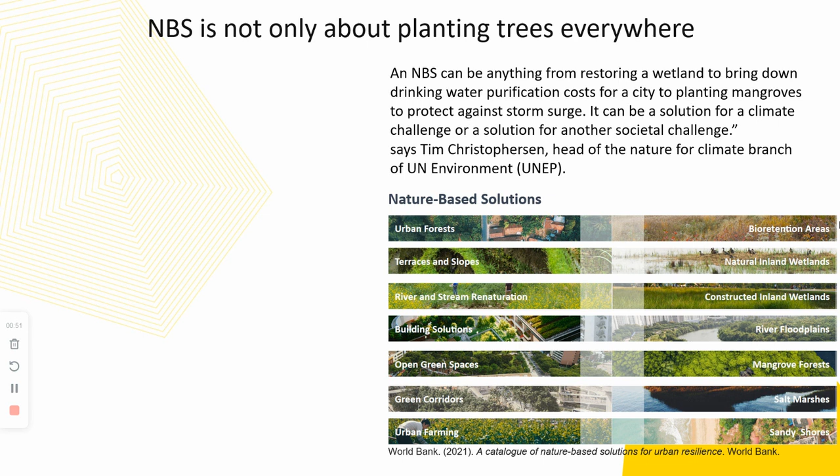The motivation is nature-based solutions. It's in our schedule, it's in our prime time everywhere, but it's not only planting trees everywhere, as you know, and some of you have been talking about. So my question is, how can we project better cities with nature-based solutions using other methods, and where to implement, in this particular case, trees, because they have provided several services, but one of them is to reduce temperatures in cities. Lisbon, three places, very different places.

I work with a municipality, and when they ask me, where do you put the trees here, I say, you don't need to put trees here. You have shadow. It's much better than the trees. Some streets are very efficient on this, but have worse ventilation. But places like that, the Praça do Comércio, it's the entrance of Lisbon, where the sailors went to New Worlds in the 16th century. They don't want to plant trees because it's against the logic of urbanism in such an imperial place. So how can we help?

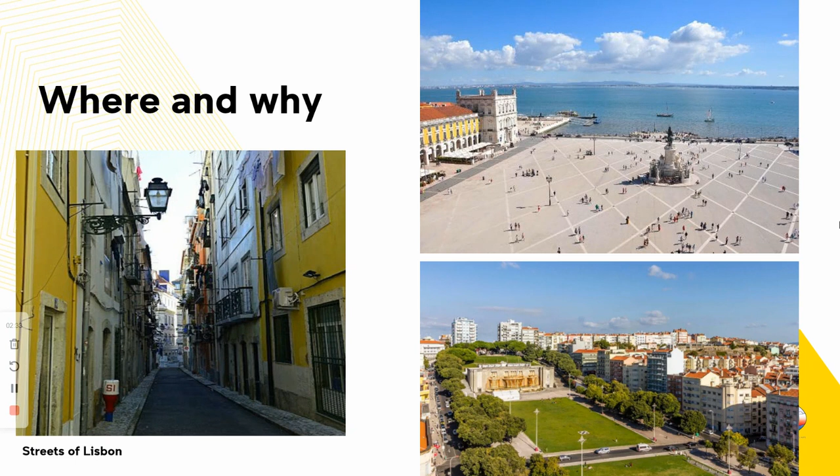And we have other places like that garden in Lisbon. As you have mentioned, lawns are much less efficient if they are not irrigated. And we have a problem in Mediterranean areas, that is, we don't have water. We have a scarcity of water. How to use water for these spaces? And for instance, in this space and others like it, sometimes the temperature is much higher during the day if it's not irrigated than in shadow spaces. So we need to carefully look at these nature-based solutions.

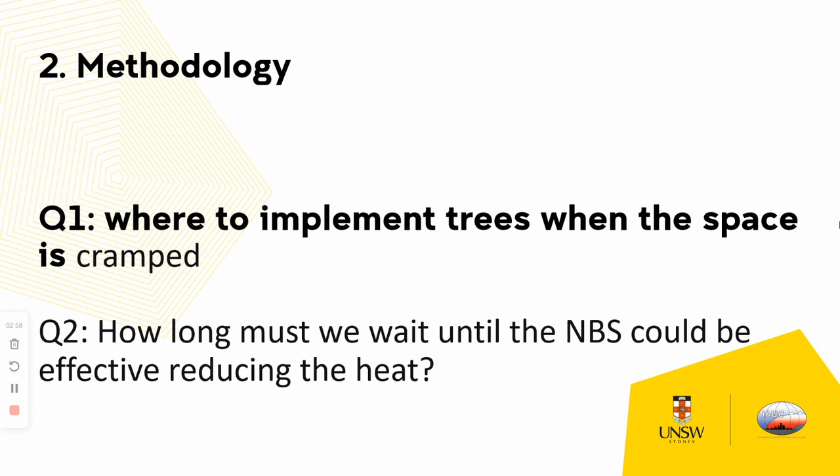So where to implement these trees when space is cramped, and how long must we wait until these solutions are effective at reducing the heat? For instance, if we plant a tree now, it's going to be efficient maybe 10 years from now, and many of us cannot be here, so we must tackle this problem now.

So the experience of Márcia, she has been okay. Yeah, sorry. Can you help me, please? Help. Thank you. No. The bottom one is the back. This one? Okay. I was clicking the wrong side.

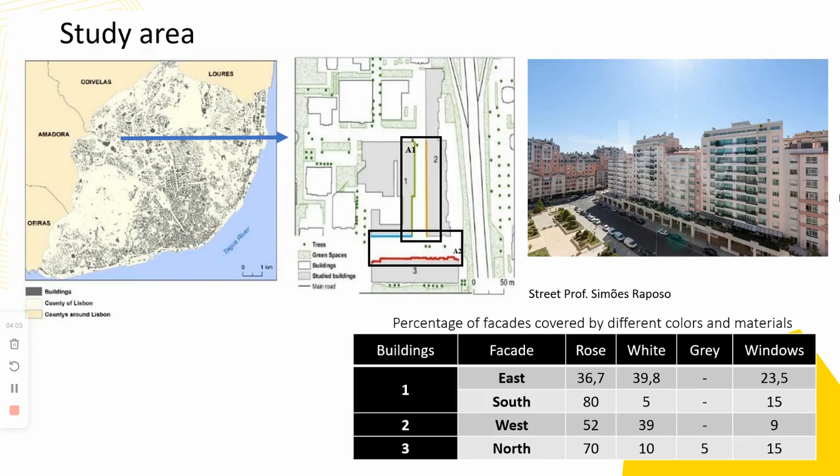So Márcia took one neighborhood in the northern part of Lisbon, two very different streets, one north-south oriented and the other one east-west oriented. So the facades are very different, and they have very different gains and losses of solar radiation. We also chose this place because we have quite a similar painting for all these buildings, especially rose, white, and gray. So now this is the so. Let's move on.

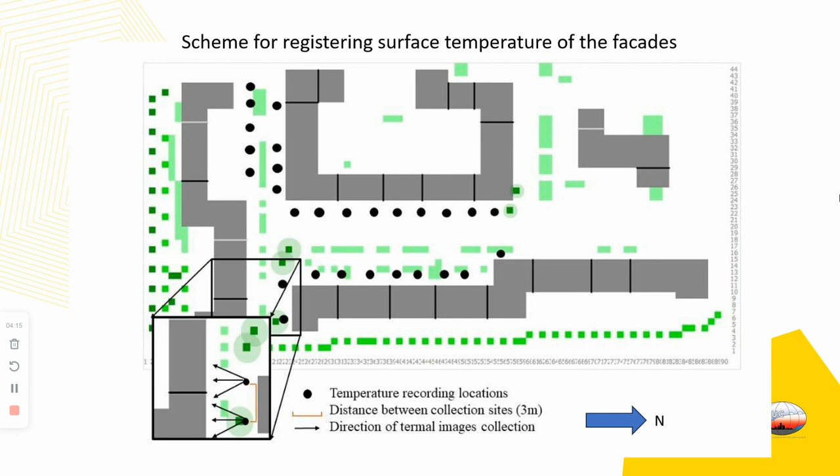We had several urban stations here, 3 or 4 stations, and she made thermal camera images to compute the surface temperatures in the facades. And as we know, the north facades generally have lower temperatures than the south facades. This is informal, empirical. We know this, but we don't know how much. So the first question I would like to pose here is, should we plant trees near the north-exposed facades, since they are less heated than the south facades? Of course, maybe we can help urbanists relocate the trees or plant the trees where temperatures are higher in the urban areas.

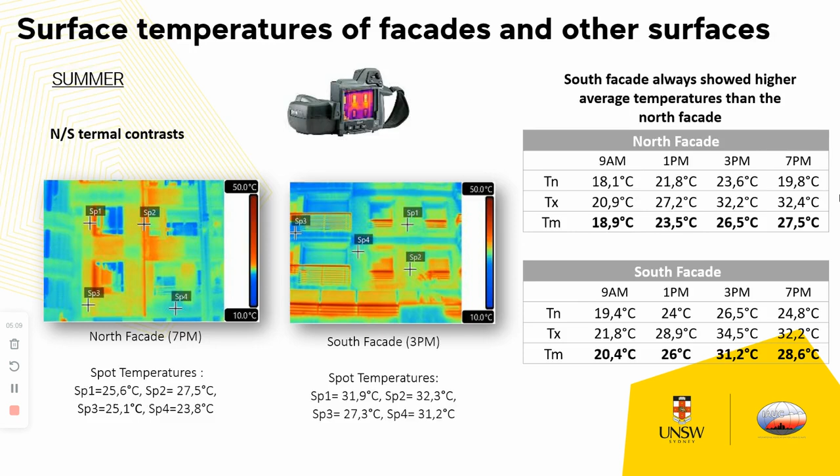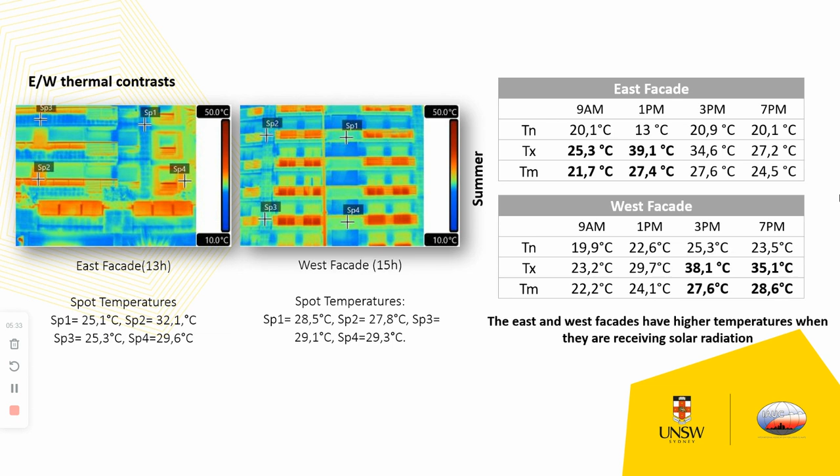So this is the east-west facade. We know there are several characteristics, for instance, between 9 a.m. and 1 p.m. temperatures are higher in the east facade because we are in the northern hemisphere, and the west facade receives more radiation in the late afternoon. So this is another piece of information that is good for making decisions. So we had three kinds of surfaces. That was facades, and now the soil, the street.

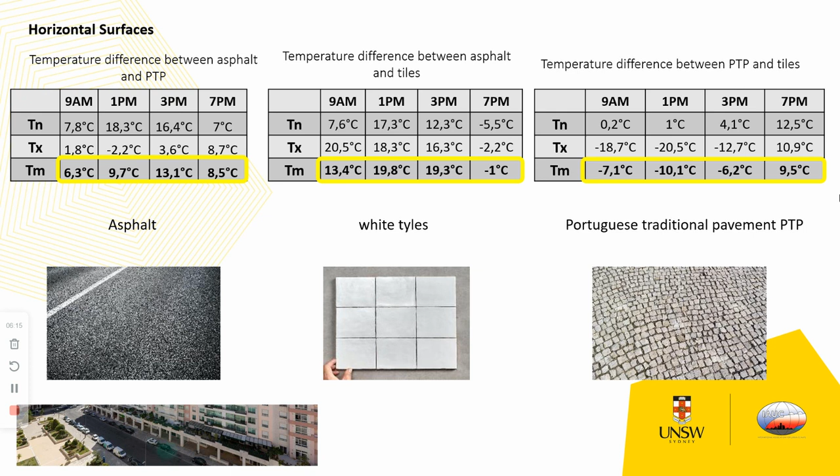We have asphalt, white tiles, and Portuguese traditional pavement. I think only in Portugal and in Brazil, in Rio de Janeiro, you use this kind of pavement. It's a small limestone pavement. We can see at several times that most of the time the asphalt has a temperature higher than the other ones.

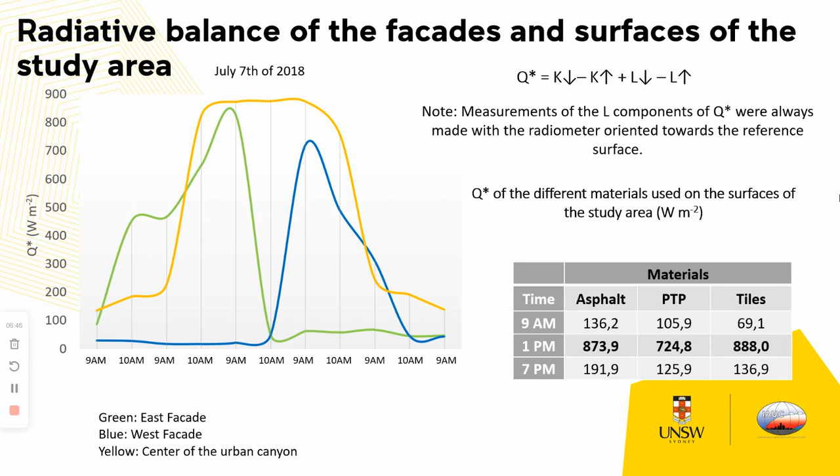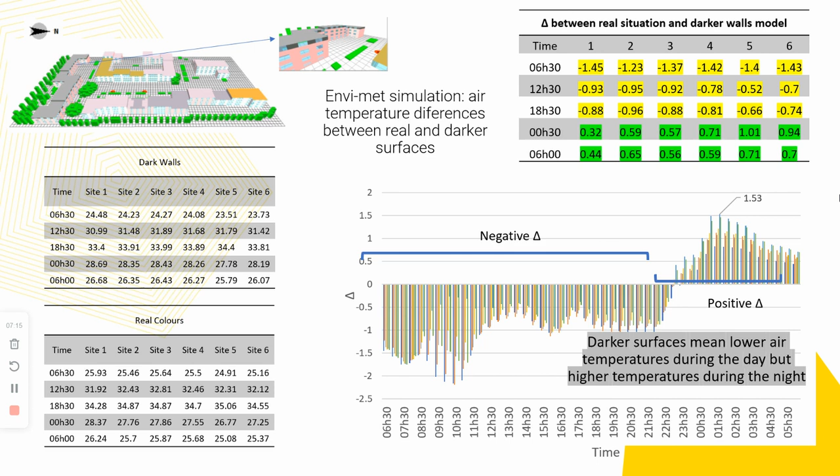And here we have the second stage of this research. It was making simulations with ENVI-met, and what she did was to change the surfaces to see if we can have an improvement, a positive improvement or a negative improvement. And so darker surfaces mean lower temperatures during the day, but higher temperatures during the night because of the net balance.

So our discussion here is yes, we need nature-based solutions. We need trees in our cities, but we cannot have trees everywhere. We have several studies in Lisbon, and we know many trees we plant in the streets fall down during thunderstorms and other storms, especially windstorms. So planting trees is a delicate, a surgical science.

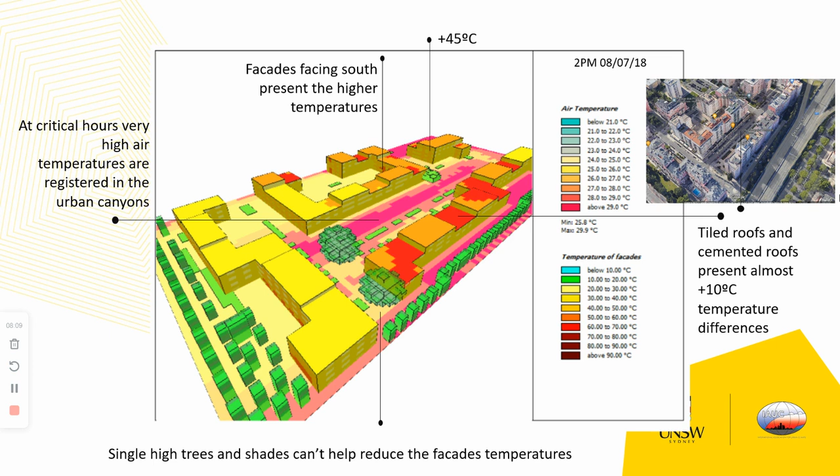So we suppose that with this kind of modeling and with this kind of measurements, we can say where to locate, where are the best places, and of course, in the facades that get more energy and more temperature. And of course, we need better, efficient surfaces, not only nature-based solutions.

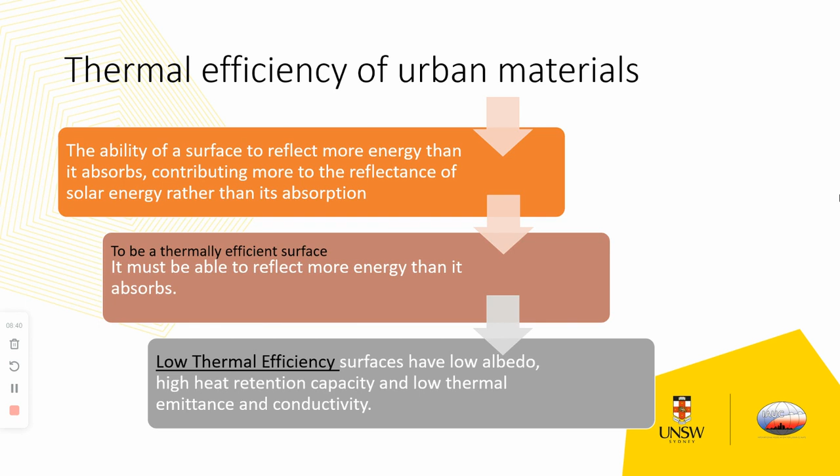And we saw two days ago Dr. Santamouris talking about the new materials. We also need, in complement of nature-based solutions, or nature-based solutions should be the complement of these new materials that can help us to make more thermally efficient surfaces. Okay, so I think we are on time. Thank you for your attention.